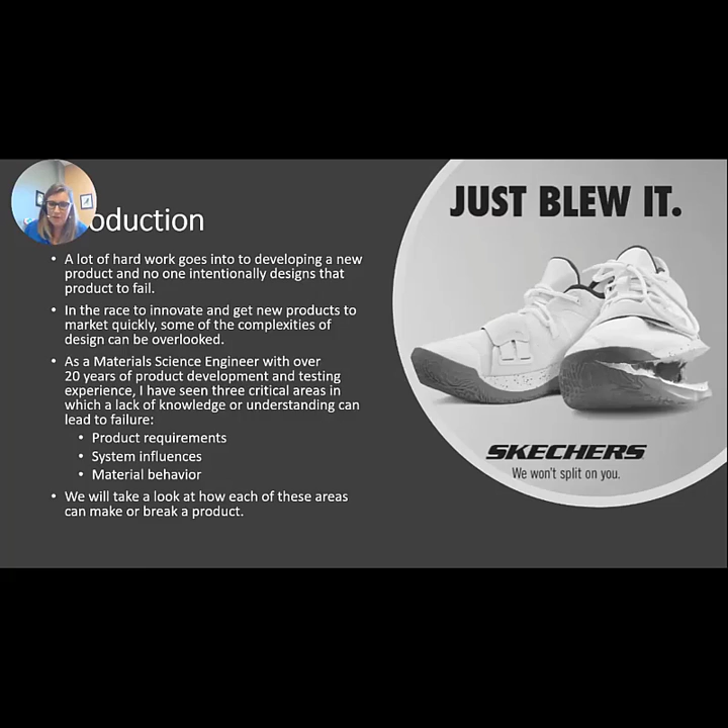All right, so the first area, product requirements. Understanding the requirements for your product is critical for successful design. If you don't know the requirements, or if the requirements are incomplete or not really representative of how a consumer is going to use it, it does run the risk of failing in the field. So your product requirements need to take into consideration the intended use, but there's also potential abuse situations that should be considered as far as consumer safety goes. And then also atypical use situations. Understanding maybe the odd duck and how they might use your product can provide important insights as well.

Now, you might not choose to design your product for that odd duck, but it's still good to know what those are. And then you can look at the failures when they come in and say, this is one of these atypical situations. So for these requirements, you have to know mechanical loads, cycles, electrical requirements, what the environmental conditions are. Is it going to see UV light? Is it going to see elevated temperatures or subambient temperatures, just to name a few.

If these requirements aren't known, then sometimes you have to use consumer research and field testing to find out what they are. This can be especially a challenge if you're designing a new product that hasn't been in the market before, something truly innovative. In this case, maybe even consumer research might not provide you real guidance on the requirements. One example I had in mind was the internet. If you would have gone back in time and asked consumers what they wanted from the internet, chances are they wouldn't have had a lot of answers because no one could really wrap their minds around what it is. And it definitely wouldn't be what we have today.

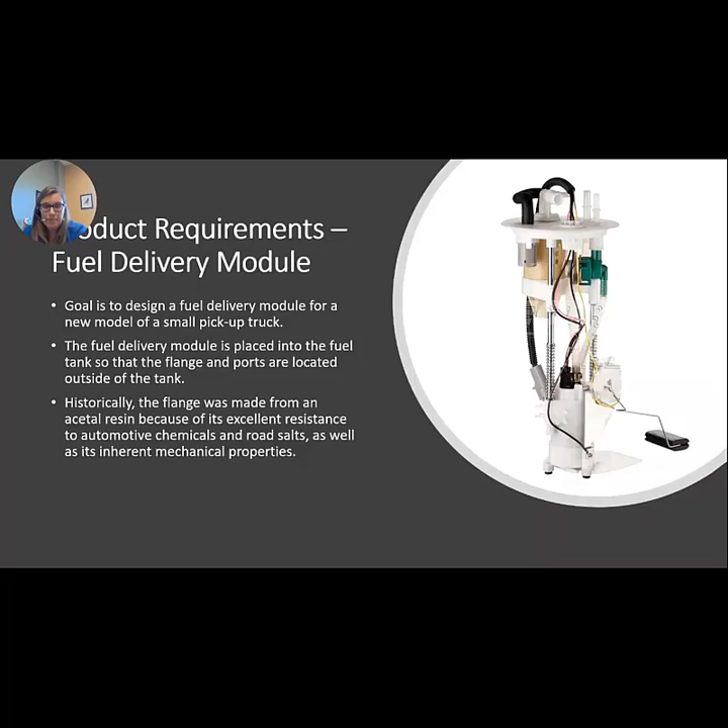So the product was designed, it passed validation testing, passed product testing, but then once it was on vehicles in the field, it began to see some failures. So the fuel flange that I pointed out in the previous slide, which was at the top here, this white piece with these ports, started showing cracking. It started showing cracking in the ports and adjacent to the ports.

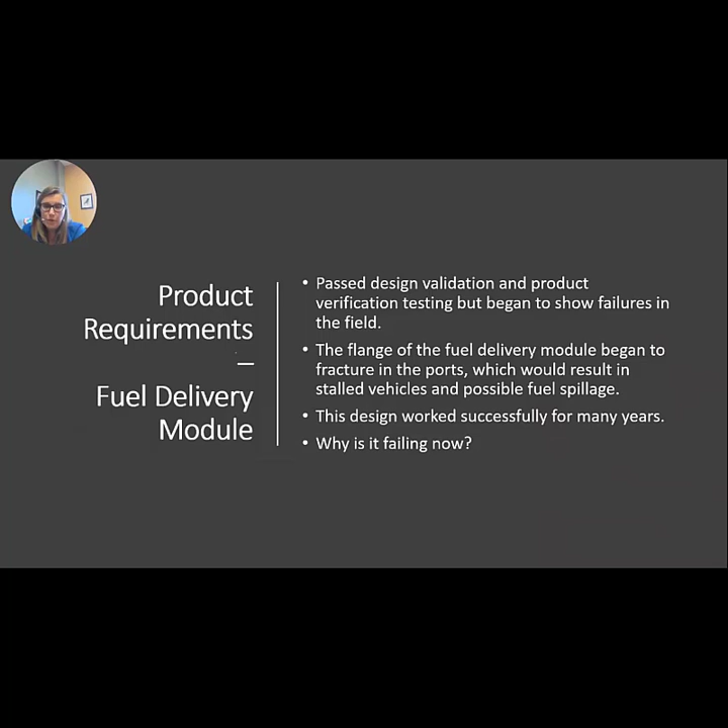So this could result in your vehicle being stalled. It could also cause fuel to spill out of the vehicle onto the surrounding environment. So again, this design worked successfully for many years. What's going on? Why is it failing now?

So part of the new model design of the pickup truck was the location of the fuel tank and therefore the fuel delivery module on the vehicle. So it was moved to a location where there's a gap between the truck bed and the cab. And that gap was just big enough that in certain geographic locations, certain times of day, certain times of year, that flange would begin to see ultraviolet light exposure. So that was never before a requirement for this product, but now it was.

And the other thing that changed with this location was the drainage holes of the truck bed now allowed water to come out and whatever chemicals were in the bed to come out onto that fuel delivery module flange as well. So chemical resistance before was considered to be automotive fluids, road salts. It was not considered to be anything that could be carried in a truck bed.

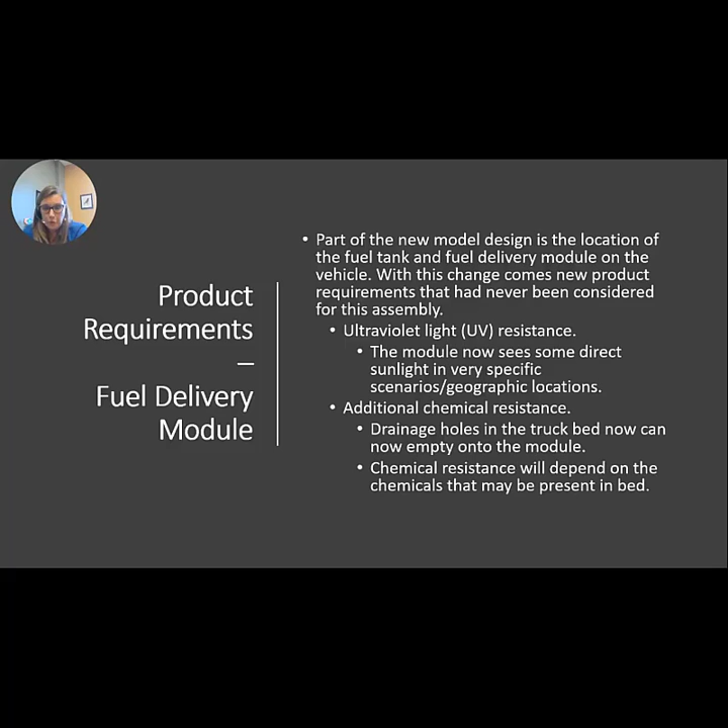Like for example, one really aggressive chemical would be boat hull cleaning chemicals. Those are very acidic. Or pool cleaning chemicals. Those are also very, very strong. And so now it's got to also have this resistance to these other things that weren't previously considered, given this runoff from the bed.

So the key to successful product launch is knowing the product requirements completely before you launch. If you find out there's additional requirements after you launch, you're going to have the failures. And once you have a design, once you have a material selected and you have tools cut, changing those things is a very costly proposition, especially if you have a potential for recall, you have product in the market sitting on vehicles, because there could be liability involved in that failure.

So had the designer understood these new requirements, he might have been able to select a different material, one that contained a UV additive, or maybe even add on a shield to block the UV light and the truck bed runoff.

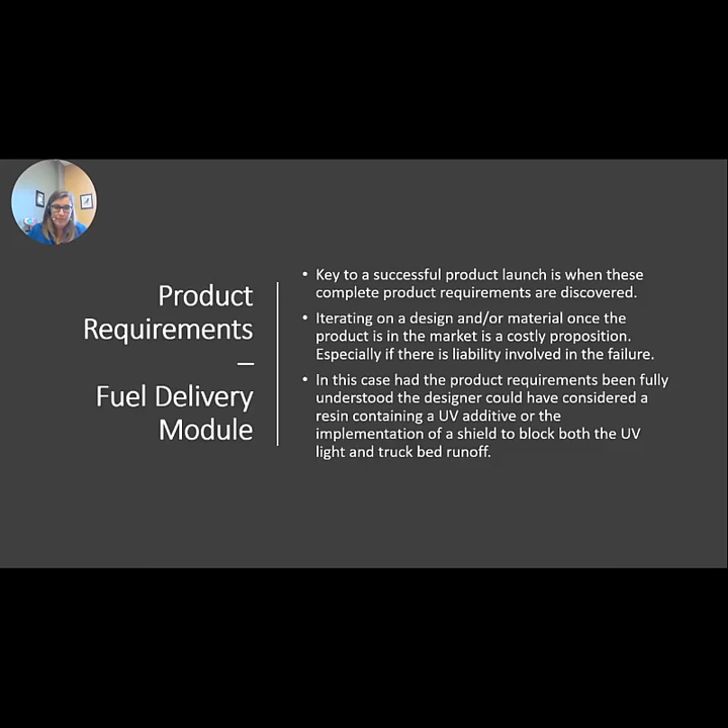So our second area that we're going to talk about is system influences, and this is a lot more complicated and harder to wrap your head around. It's hard to look at a product from a holistic standpoint and all the things that could interact with the other components that are there. Especially when today, a lot of times large designs are done on a system by system basis or a component by component basis with a larger assembly.

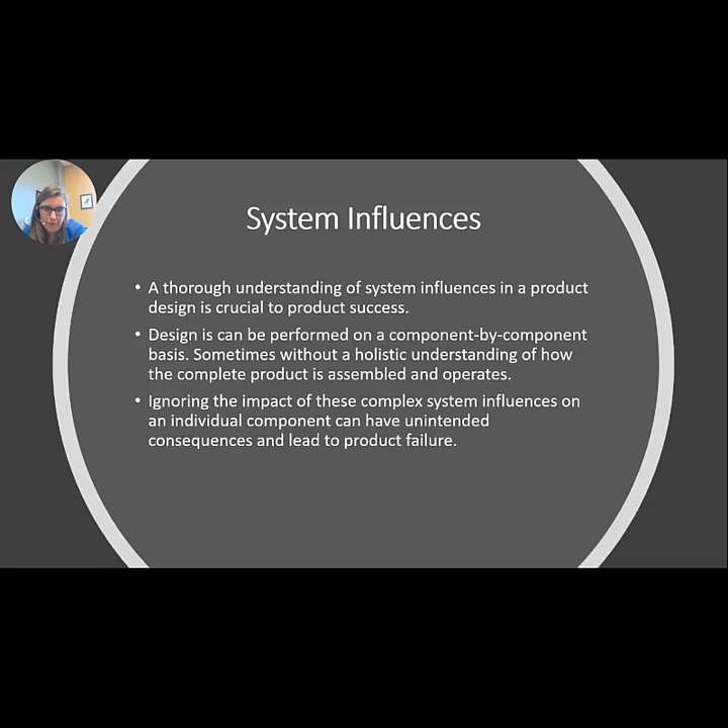And sometimes not everyone communicates and collaborates with one another. You get kind of siloed and you don't really understand what might be upstream from the part you're designing and how it might impact your part. But if we fail to consider the complex system influences, we're going to lead to failures unintendedly.

So the first case study we're going to consider is a water valve assembly. So this is a part that's used in a heavy-duty industrial truck. It's found in the engine compartment. So the designer knows here that we need to have chemical compatibility of the plastic material of the housing for underbody or under-hood chemicals, oil, gas, fuel, antifreeze, but also road salts.

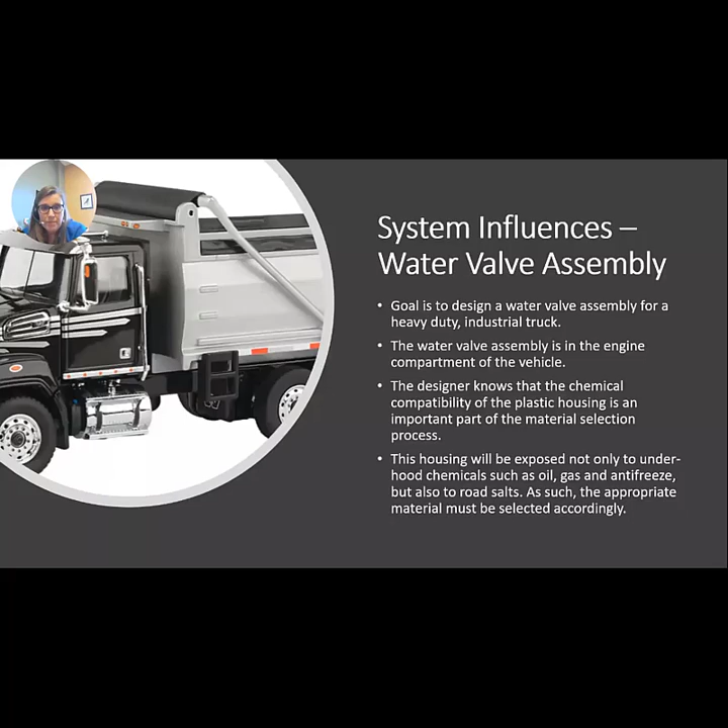And he or she understands that they need to select the material according to those chemical resistance requirements. So the designer picks out a glass fiber filled acetal. I'm also not picking on acetal here, so don't get in your head that this is a bad material. But it was selected due to strength, chemical resistance, its resistance to elevated underhood temperatures, as well as manufacturability.

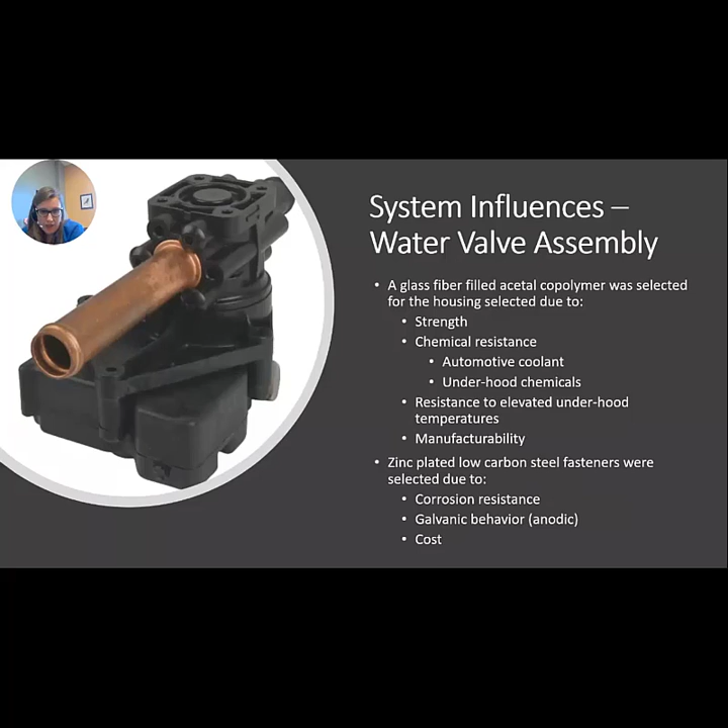But the 3 screws here, it's important to note that those were selected to be a zinc-plated low-carbon steel. They've got good corrosion resistance. Their galvanic behavior is good in conjunction with the copper tube, and they're low cost. So the design passed the required salt spray testing, but when they put them on for vehicle testing, they started showing failures at low mileage.

So what happened was, you can kind of see it on this picture here, we've got fasteners that are falling out. So this fastener fell out and allows this copper pipe basically to loosen up from the body, and it allows leakage of the fluid. And we've got some corrosion products on this one. This one you can't see very well. But the designer diligently reviewed the chemical resistance requirements. So this shouldn't have happened.

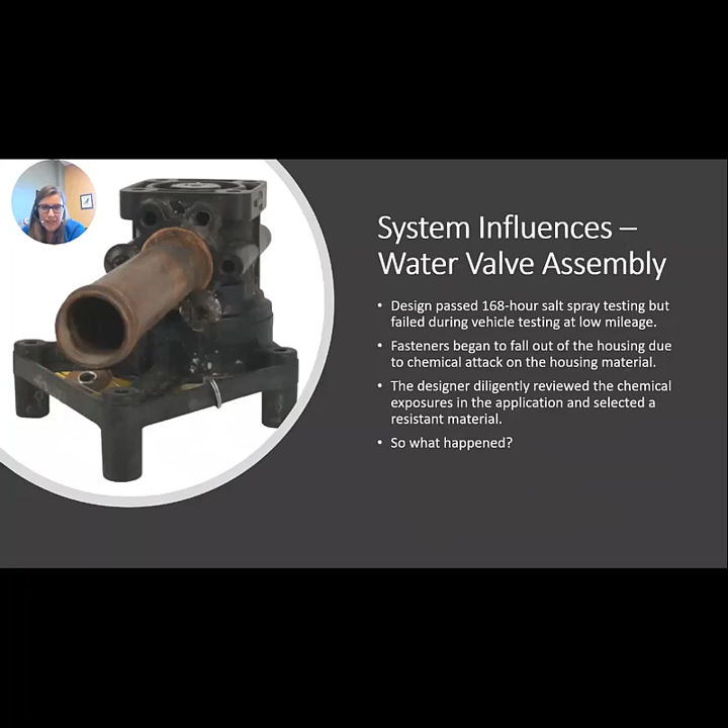So what did happen? What the designer didn't know was that there was going to be secondary chemical exposure to zinc chloride. Zinc chloride basically forms as a corrosion product between zinc platings and road salts. And when you have zinc chloride and acetal, you have incompatibility. So this is a close-up photo of where that bolt had fallen out of the housing, and you can see you've got just glass fibers. All the resin that was there has been basically eaten away.

So you're going to say to me, well, I don't understand. It passed the salt spray test. They did the corrosion testing. So it's important whenever you're doing product tests that you understand their purpose and their limitations. In this case, the salt spray test is to evaluate the time it takes for the fasteners to get to red rust. It's not intended to evaluate the chemical compatibility of the corrosion products with the housing material.

And actually, performing that testing, you're constantly washing away the corrosion products. So it might take 168 hours to get to red rust. You're forming zinc chloride, but you're rinsing it away so quickly because it's continuously putting water on the part. So as fast as you form it, you're washing it away again, and it's not having time to dry and to get saturated and to actually attack the polymer.

This is not a real world situation, because we know if we hit salt spray, it dries up and it produces a white product on the vehicle, and then it snows again later and you get more salt. So it's cyclic in the application, but not in the test.

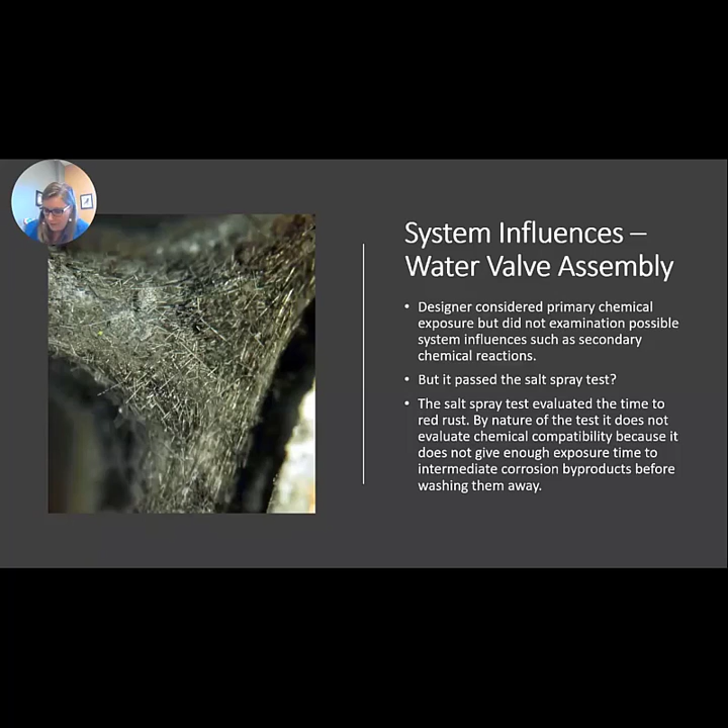So in this case, had the designer fully understood the system influences, he could have chosen a different fastener material, such as stainless steel. Now, given stainless steel fasteners are more expensive, they're less expensive than the cost of field failures, of redesigning the housing, as well as tarnishing the reputation of your brand.

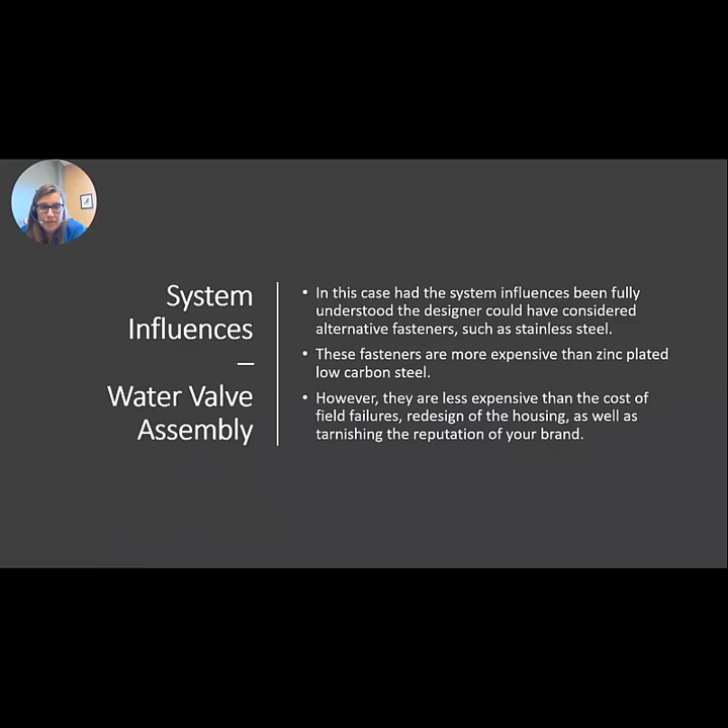And finally, my third area to discuss is material behavior. And this is where I'm really passionate, because some of these are all kind of related to material behavior as well, but you really need to understand requirements and the system influences to even start considering the material behavior underlying in all these cases. So this one is more specific to the behavior itself, and it's really important, especially with a plastic material, that you really understand how time and temperature impact its performance if you're going to have a successful product.

So my case study here is a blend door that's used in an HVAC module in a vehicle. So this is in your dash, and somewhere in this giant assembly is the blend door. And historically, it was always made from a glass fiber reinforced polypropylene. So as you see in most vehicles today, the space requirements are getting more and more.

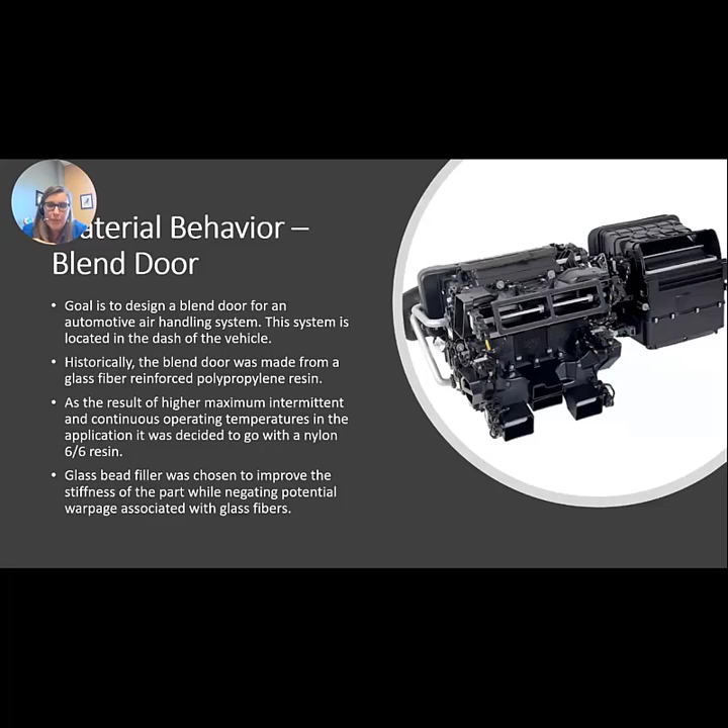So everything is trying to get miniaturized, and as things miniaturize, it generates more heat. So in this application, this new model, they were seeing higher temperatures in the case and in the blend door location. So they decided to go with a more heat resistant material, which was a nylon 6,6 resin. The other change they made was they got rid of the glass fiber and opted for a glass bead filler in order to get rid of some of the warpage issues they've seen in the past with using glass fibers in this application.

So FEA and product testing looked good. So they went to market with this design and they started to see field failures again at low mileage. And what they were starting to see was deformation of the blend door you see here. On the bottom of the part, you have two areas where you essentially are pivoting the door. And then this tab here is where you would actuate the door during adjustment of your temperature controls. And then around the peripheral, you'll have a foam seal that's used to seal off the door to the main chamber.

And you might ask, well, what's the big deal? It's just deforming a little bit. But really, there's two things. One, the OEM specific requirements for temperature control in the cabin are very tight. And having something be deformed like this could make you run the risk of not meeting that spec. And secondly, if it deforms too much, you could run the risk of binding the blend door, and then you can't actuate it any further in the application.

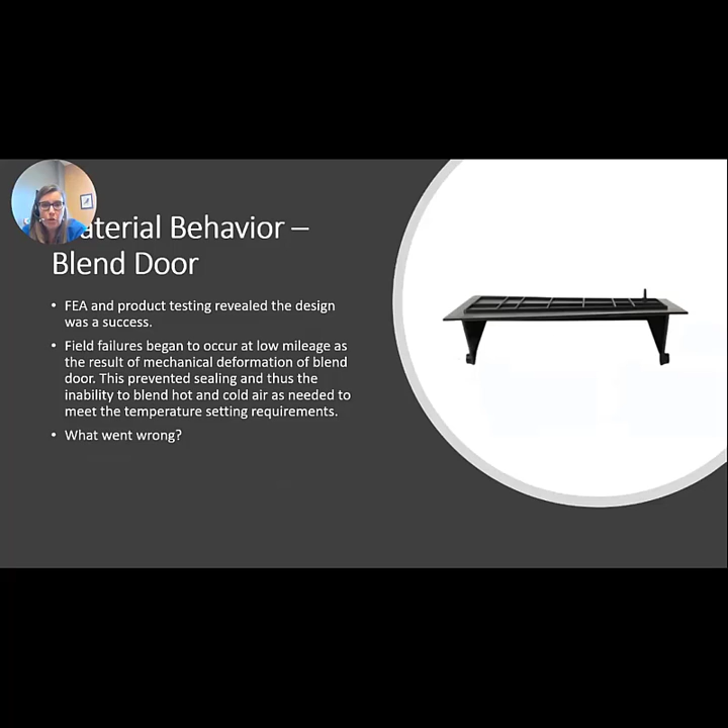So the FEA and product testing looked good. So what went wrong here? So keep in mind, I said historically they used a polypropylene resin, and now they're using a nylon. And what they didn't realize, because it was a material they hadn't worked with before, was that nylons absorb water. The water gets absorbed and it becomes like a plasticizer, and it decreases the stiffness of the material. It makes it more ductile, but it makes it less stiff as well. So when they did the FEA testing and the product testing, they essentially did it using what's considered dry as molded parts and data from the supplier. They didn't use conditioned parts or conditioned data.

So one of the things we did to kind of emphasize this with them was we took a door and we did some flex testing. And you can see here at some of the temperatures that they're operating at that you're getting a significant decrease in stiffness with elevated temperature. But now once you condition that nylon door at 23 degrees C and 50% humidity, the water absorption is decreasing the stiffness of the material by about 75%. So this is a huge impact. And this difference is going to make the difference of your door deforming permanently in the field or not.

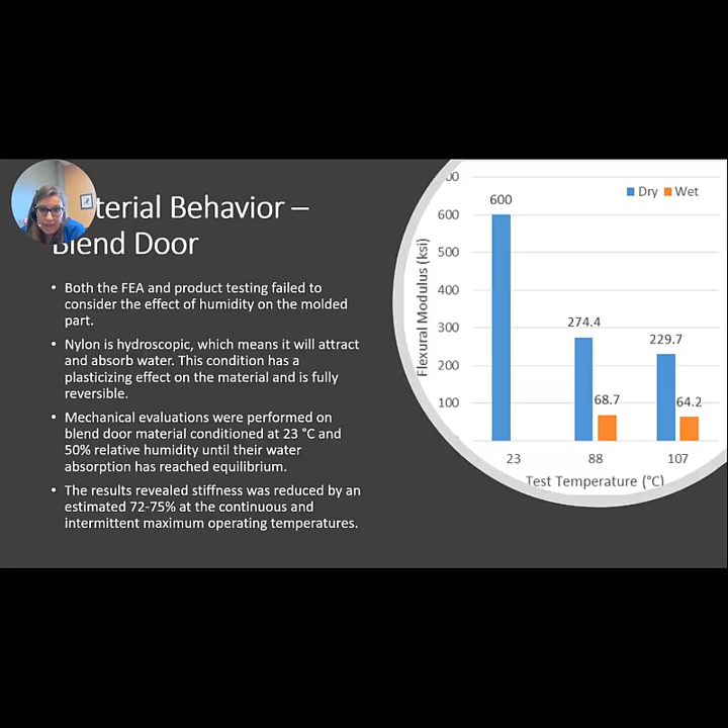So this is just really important to highlight here that when you execute your FEA simulations, you need to go beyond the data sheet. You can't just use room temperature short-term data. You got to think about how the material's behaving at the maximum continuous operating temperature of the application. How is it behaving when it's conditioned, when it absorbs water? You want to make sure that you're not just designing a product or a part that's going to survive at time zero room temperature. You want to make sure that that part and that product is going to survive out to the end of the warranty period.

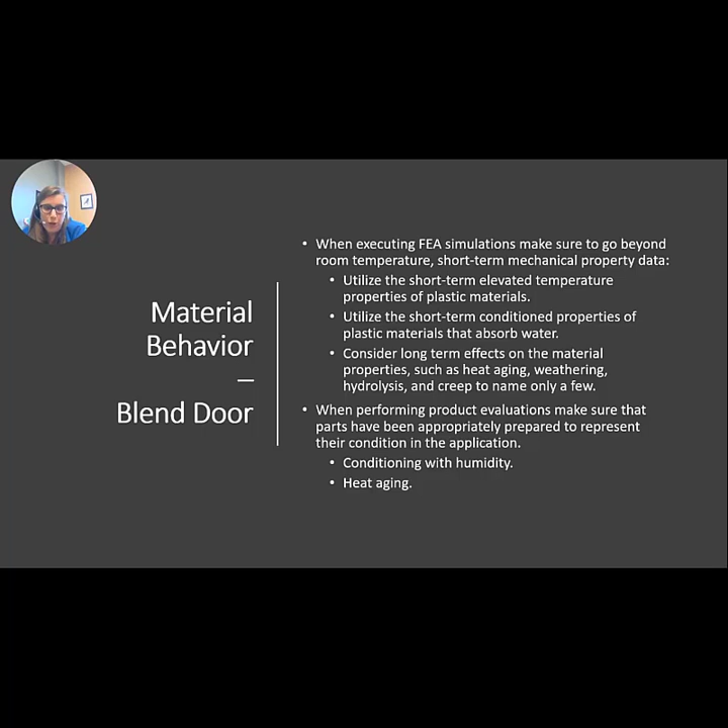That might also mean taking some parts or some material specimens and heat aging them, and understanding the impacts of what heat aging will have on it, or weathering, or whatever application that your part is in. The other thing is the product evaluation. So same thing, if you take a part out of a mold and you evaluate it, it could pass, but that doesn't necessarily represent what the part's going to be like a year from now, once it's heat aged or once it's conditioned with humidity. So it's really important not to just evaluate something new and shiny, but to consider how time will impact those properties within the warranty period as well.

So in conclusion, you've got to go beyond just making something that looks cool and has great features. You want to meet your client's expectations. You don't want to give something to a client or consumer that looks good and makes them feel good, but then a month later is failing. And you also want to protect the customer if there's safety issues with the product, and you also want to protect your brand's reputation.

So I know I went through a lot of stuff here that's really maybe more material specific, but what I want to highlight is you just need to use critical thinking skills as you try to get the details sorted out for requirements, system influences, material behaviors. "We have always done it that way" is a very dangerous thing, especially when you're trying to innovate and develop new products, and product requirements are always changing.

So one of the things I always think of too is just because they've always done it that way doesn't mean it's successful. You don't know, for that product that was designed that way 5 years ago, what the failures were or what the consumer feedback was and what their complaints were. So you could be adopting design as well as material selection that wasn't the best thing for the brand or for the product or for the consumer.

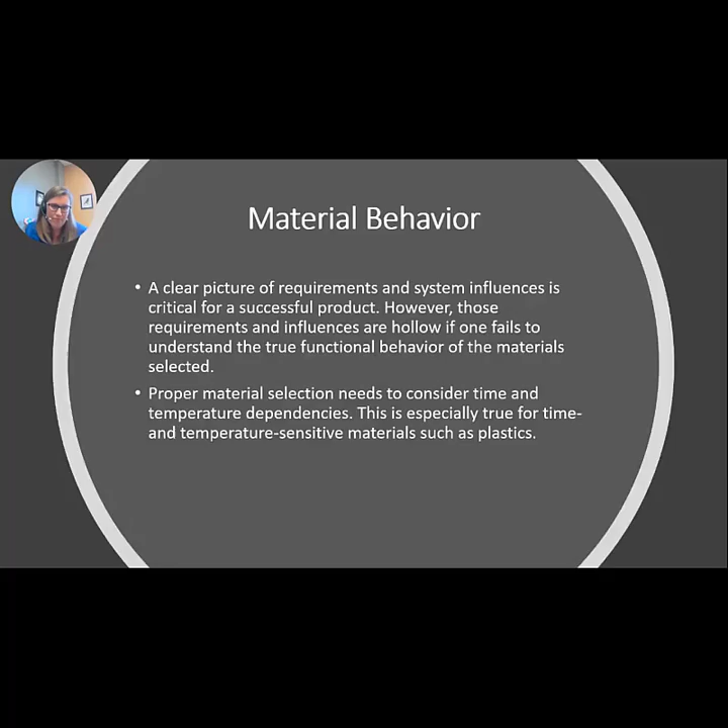I think it depends on whether you're designing a new model or a new version of a product a consumer's already familiar with. Then it might be easy enough to do some survey type work, whether in-field surveys or electronic. When you have a product that's so unique that there's nothing on the market like it, you really need to identify who your target consumer is, get in front of them and really understand what they'd be looking to have as far as features and functions. Because in those cases, you can't describe it very well. You need to sit down with them and show them prototypes or mock-ups they can relate to. It's more of a discussion, but I think it yields much richer content.

Thank you. I certainly couldn't argue with that. Here's a question. There are always new materials coming out on the market. So how can a designer be certain that they have created a testing scenario that is up to the task? I'm guessing that the material supplier has created a testing scenario.